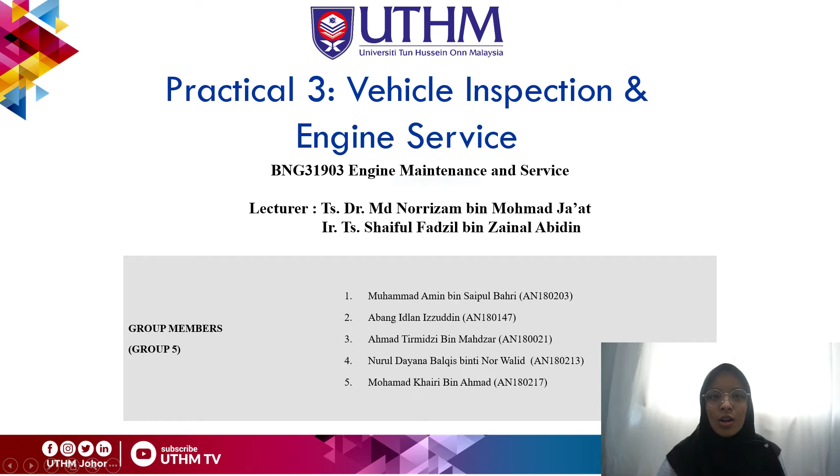So today we're going to present two parts: vehicle inspection and replacement of engine oil and filter. The first one is vehicle inspection.

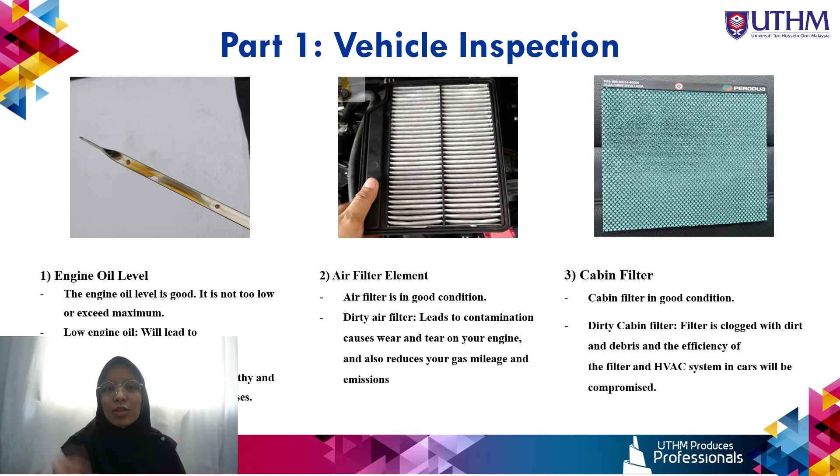The next one is cabin filter. This cabin filter is in good condition, and if the cabin filter is clogged, it can reduce the efficiency of the HVAC system. The next one is transmission fluid check.

The power steering fluid is in need of attention because it is not full and it is not too low. If the power steering fluid is too low, it can cause more air to enter, and the combination of low fluid and lots of air will make the pump malfunction and also make noises.

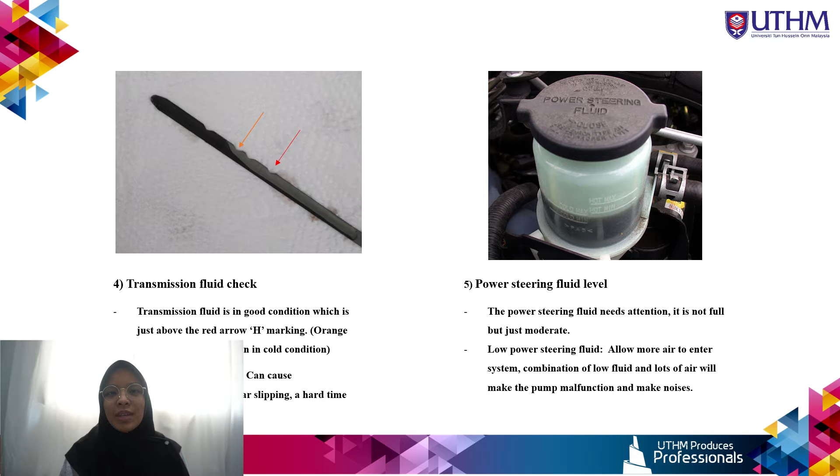Not changing the brake fluid will cause moisture contamination. Overfilling brake fluid will cause leaking, which will cause corrosion to the engine if not cleaned immediately.

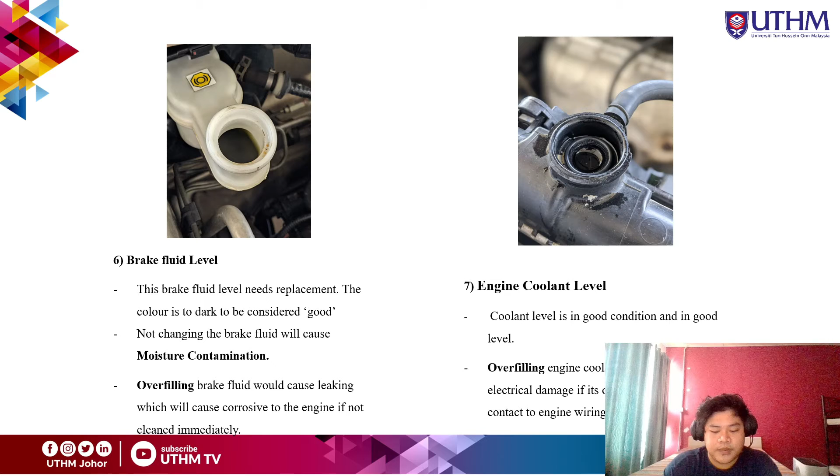This is washer fluid. Washer fluid level seems to be in good condition. Overfilling the washer fluid could lead the container to break and cause leaks.

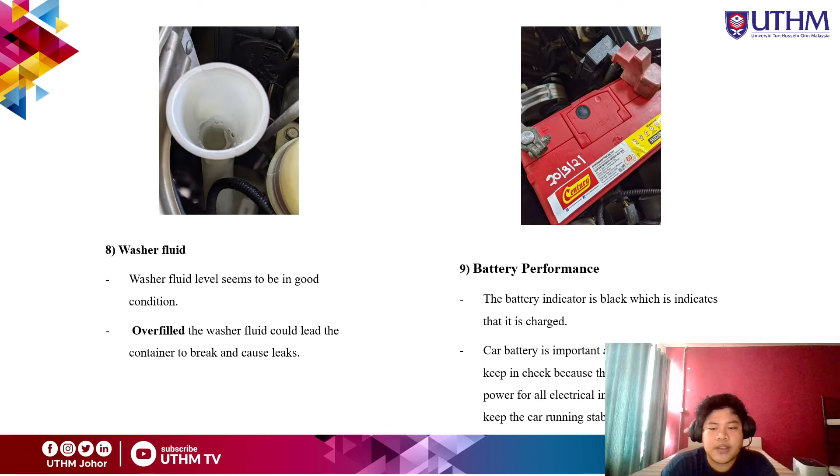Car battery is important and always needed to keep in check because the battery is the central power for all electrical in the vehicle and to keep the car running stable.

Lastly, for my part, this is engine belting. The engine belting in this vehicle is in good condition. If the belt is loose, it could slip and cause other mechanical problems such as engine overheating because the pump could not produce enough pressure.

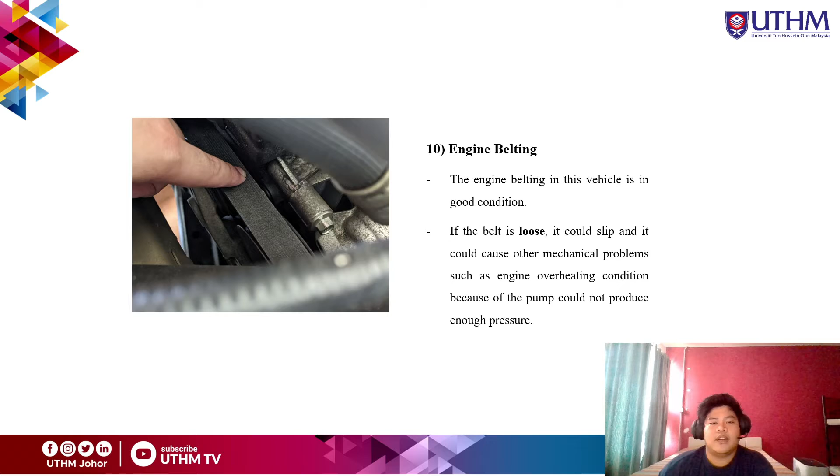Number 12, shock absorber. The shock absorber is in good condition. A broken shock absorber can cause excessive bouncing when hitting bumps, steering wheel vibration, and leaking.

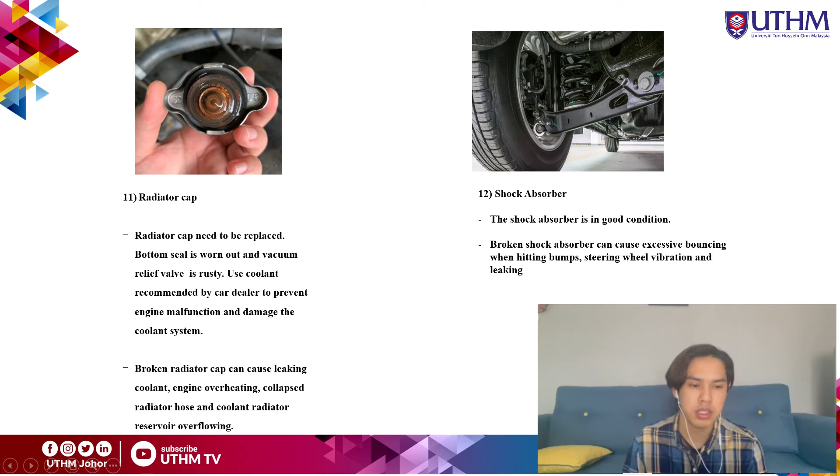Number 13, brake pads. Brake pads are in good condition. Worn out brake pads can damage the brake rotors and calipers, cause slow response time when braking, make the car vibrate when braking, and wear down your tires.

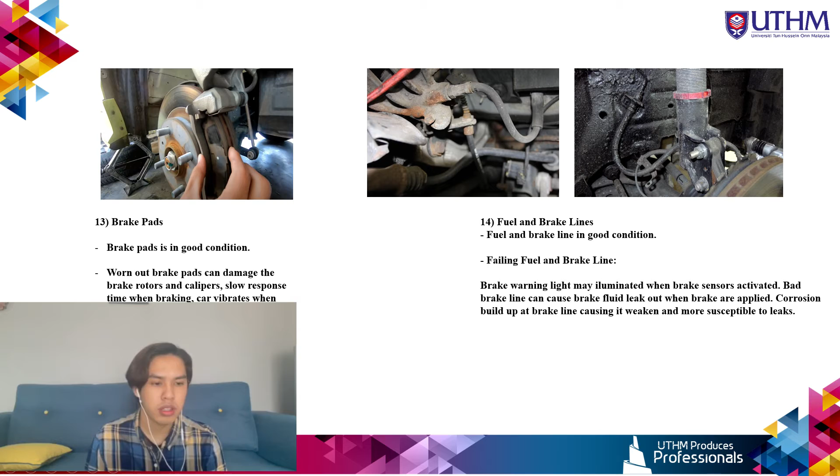Number 14, fuel and brake lines. Fuel and brake line are in good condition. Failing fuel and brake line can cause the brake warning light to illuminate when the brake sensor activates. A bad brake line can cause brake fluid to leak out when brakes are applied. Corrosion builds up at the brake line, causing it to weaken and become more susceptible to leaks.

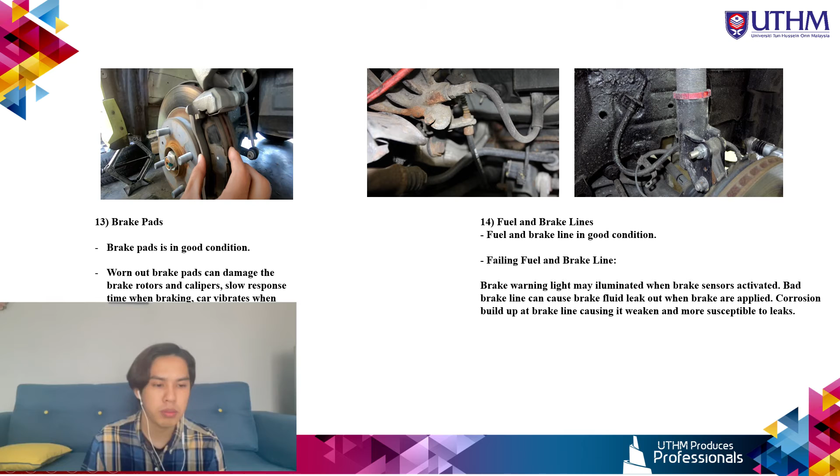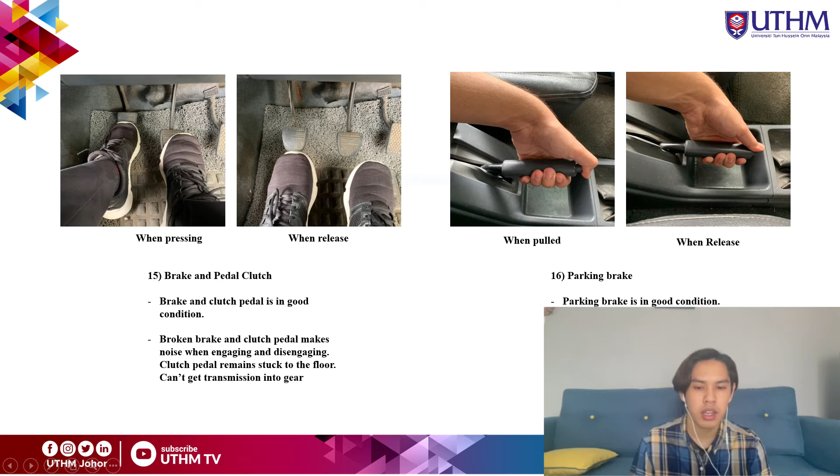Brake and clutch pedal is in good condition. A broken brake and clutch pedal makes noise when engaging and disengaging. Clutch pedal remains stuck to the floor, cannot get transmission into gear.

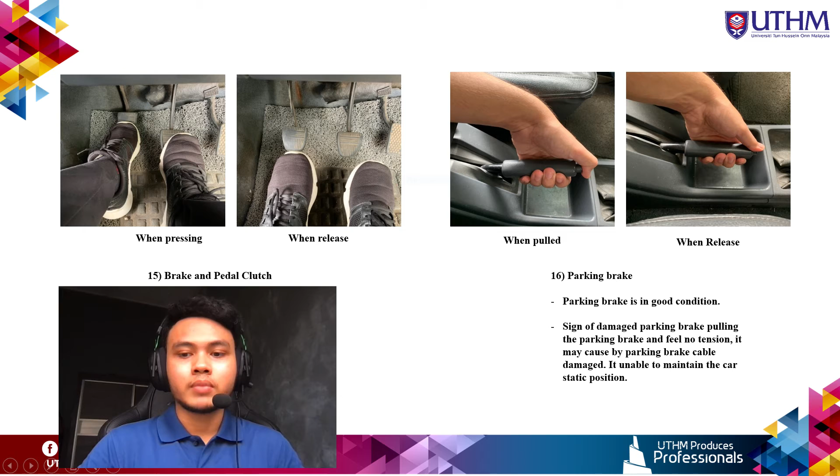Number 16, parking brake. Parking brake is in good condition. Signs of damaged parking brake: when pulling the brake, there is no tension. It may be caused by brake cable damage. It is unable to maintain the car's static position.

For number 17, lighting, horn, indicator. Lighting, horn and indicator are all functioning. The warning light will illuminate briefly when the engine is turned on to check the bulb. If the warning light remains illuminated, however, you should take your vehicle in for service.

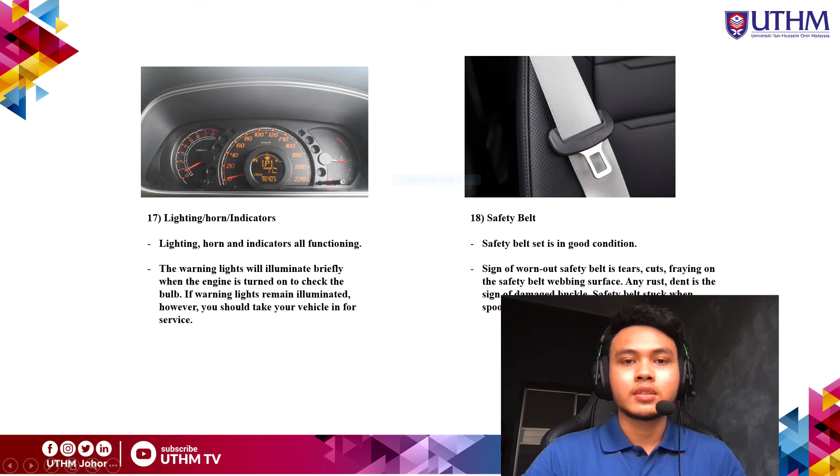Number 18 is safety belt. Safety belt set is in good condition. There is no sign of wear on the safety belt or the buckle.

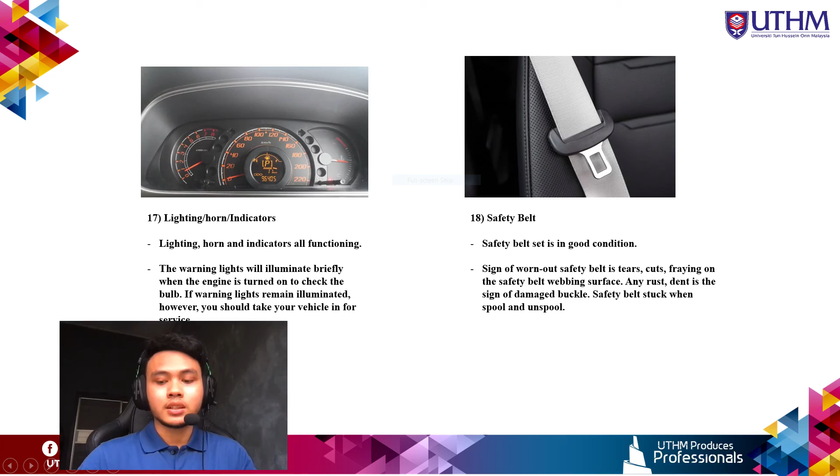Number 19 is tire pressure. For this vehicle, the tire needs to be pumped to increase the tire pressure. Number 20, tire physical condition. The tire physical condition is in good condition. The tread is still in recommended depth.

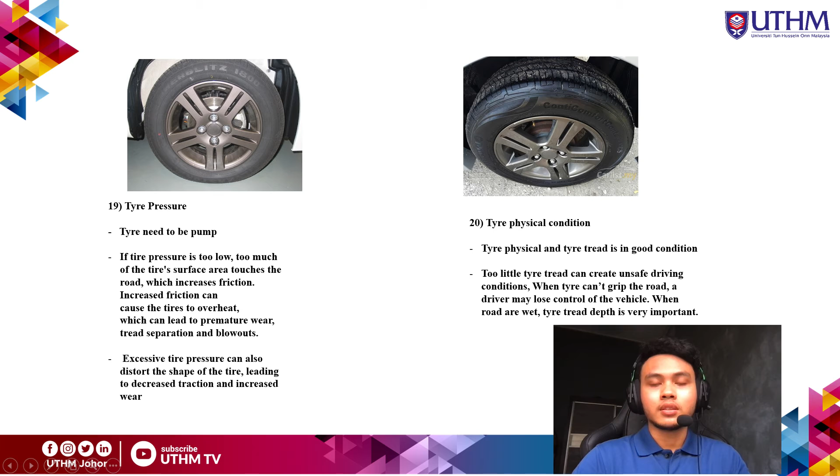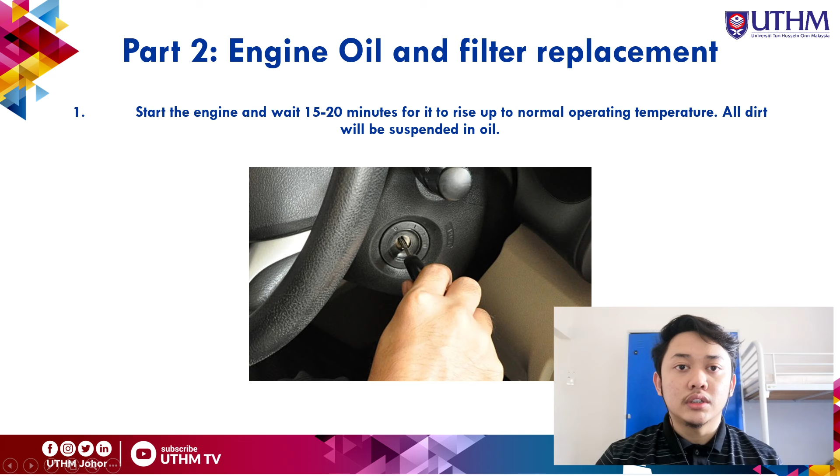So we're going to move to engine oil replacement. First, start the engine and wait 15 minutes to make sure the car temperature is normal.

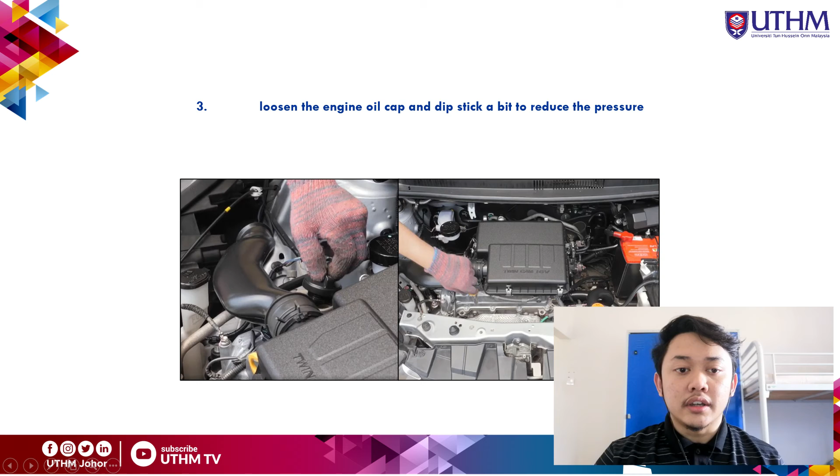Next, use a jack to raise the car and loosen the engine oil cap to reduce the pressure. Next step is to place a container and open the engine oil hood.

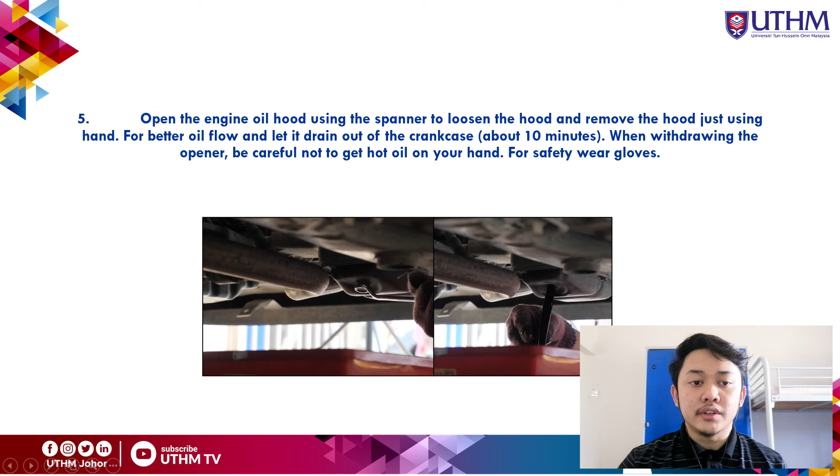Firstly, use a spanner to loosen the bolt and remove it using a hand. After that, clean the bolt and put it back.

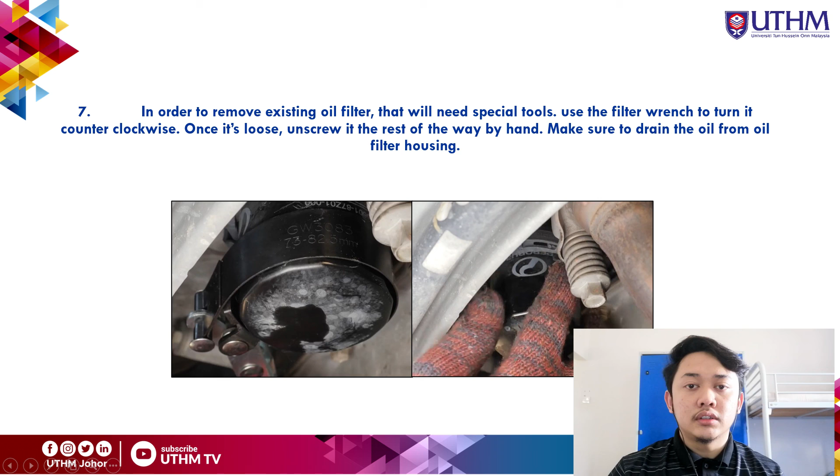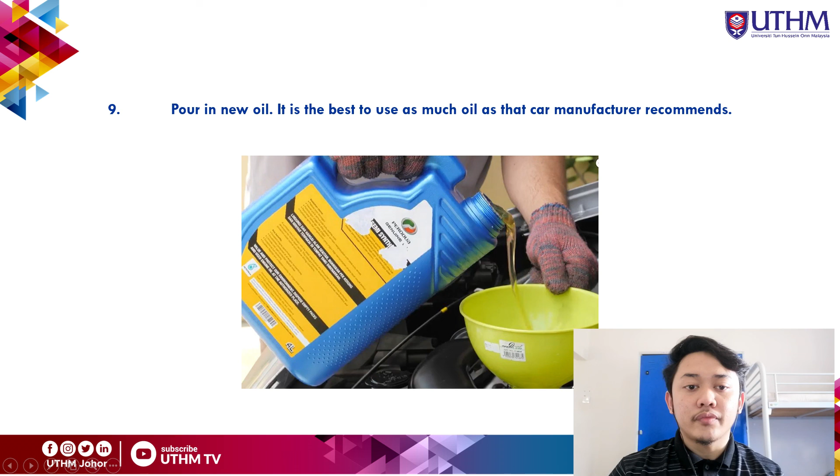To remove the existing oil filter, use a filter wrench to remove the filter and replace it with a new filter. Next step is to pour in new oil, turn on the engine, and look for leaks, making sure the temperature is stable until the warning light turns off.